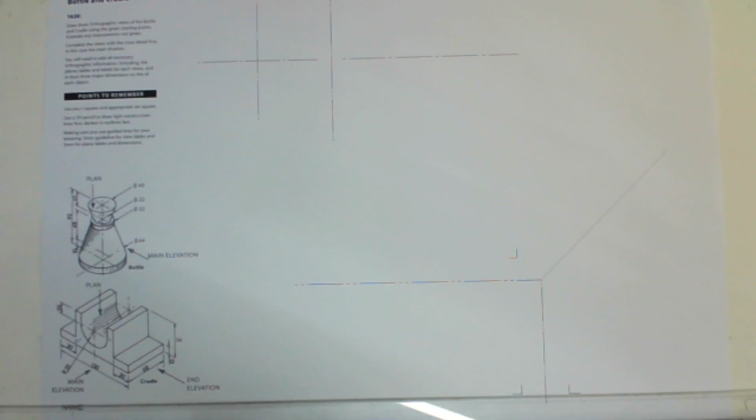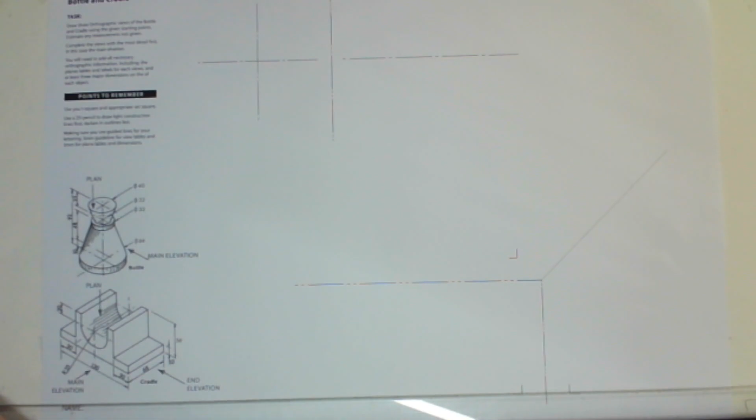Okay, so we are aligned to this one here, which is a printed line because we are never sure that the page goes through the printer straight. Are we aligned? No, we're not aligned. So I'm going to align that there.

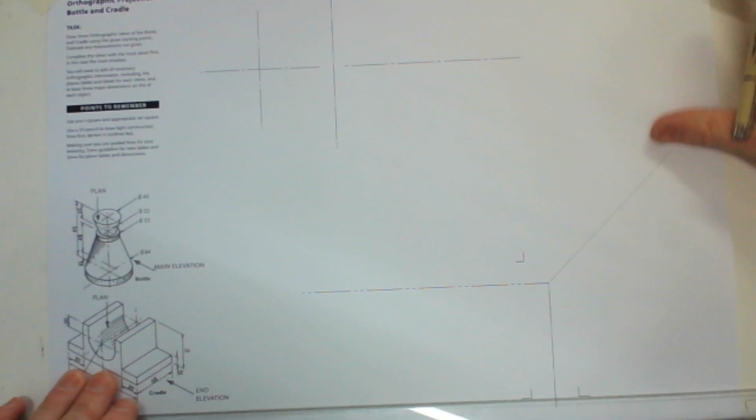Okay, so the first line we're going to do is we're going to connect these starting points. This is given to us. When we're experts, we'll have to make our own starting points and plan out a page accordingly. But for now, since we have starting points, we can draw these all the way across the side of the page. Where are my set squares?

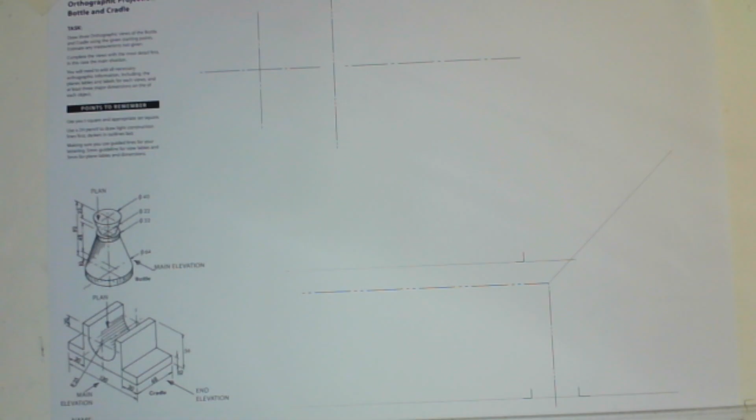Somebody has taken the liberty of rearranging these desks, and I don't have set squares. You see them? Yes. Okay, that's a really inconvenient place to have them.

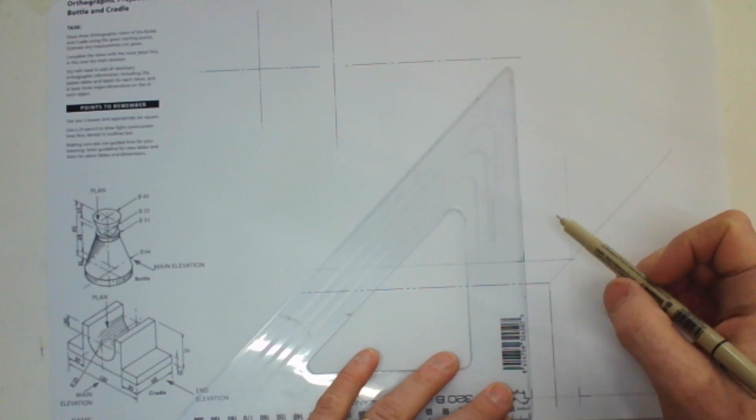And here, so please do follow along if you are watching, this includes you too. Okay, now that we've connected these starting points, let's work towards creating the 3 crates, or invisible boxes, of the views.

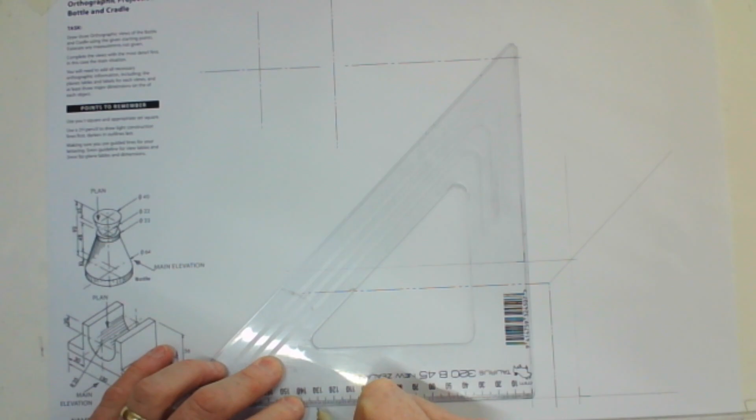So we want to look at the reference here, and we need the full length. So this one here says what? 130. So we'll put the 0 on this starting point and go 130 across. Put the tiniest dot, half the size of an ant's head, and we're going to produce a line through that all the way up the page.

We'll just see if this is a better view. Shimmy this across. Somewhat better.

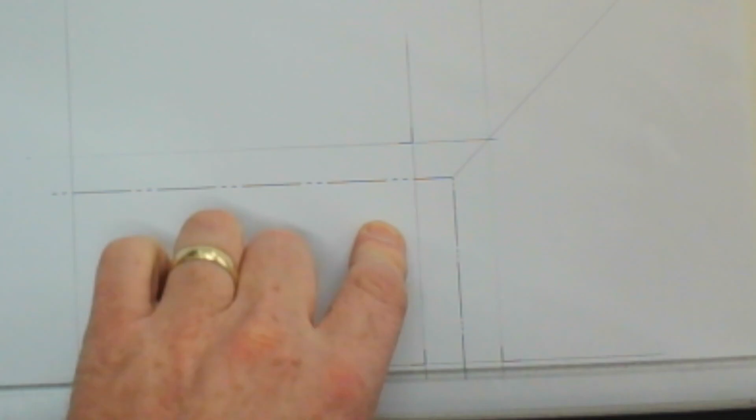And now we want the full height. What is the full height? It says 56. So put the 0 on the bottom line there, and we're measuring up 56. A dot half the size of an ant's head, and then using the T-square plugged into the drawing board, a line all the way across.

How wide is this cradle? We see that it is this measurement, this wide. So we want to know the width for our end elevation, or the height for our plan. So that is 68.

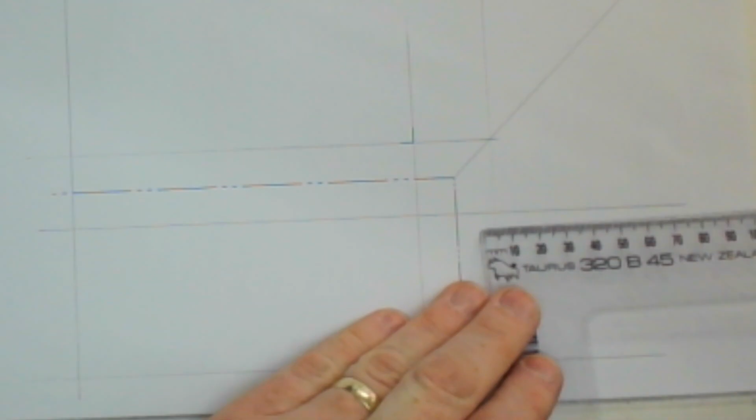So across here we're going to measure, starting at this starting point for the end elevation, across 68, a dot half the size of an ant's head, and through that dot we're going to go all the way up where it hits this 45-degree line, which we'll extend out a little bit. Then from there, looking over the T-square to make sure that we are right on the dot, pen directed towards the T-square and all the way across. Okay, I just need to extend up these lines a little bit because it's longer than I thought.

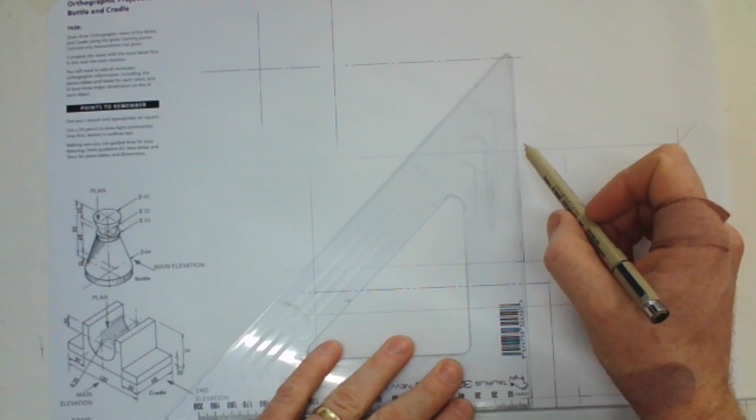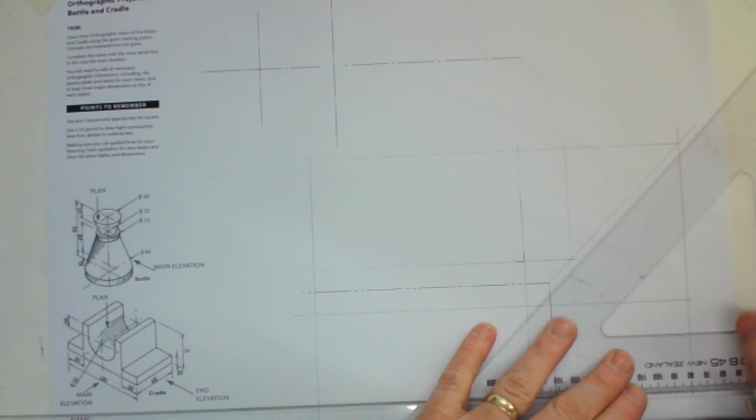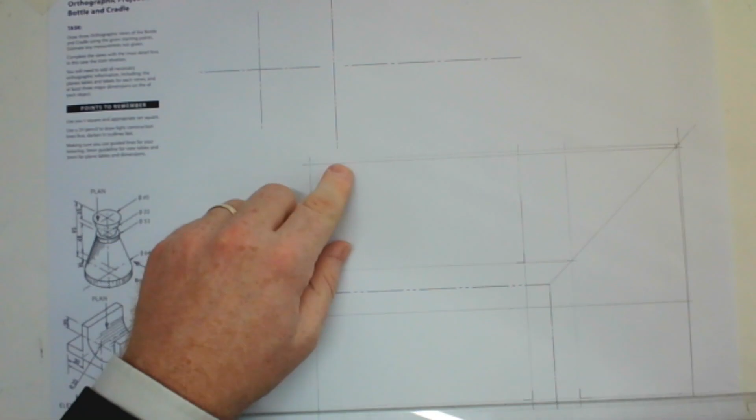And this measurement here should be 68. A little bit inaccurate there, mine's measuring almost 70. So we'll just check, 68 there. That's because that inaccuracy came by because my set square wasn't resting completely on the T-square, or my T-square moved. So I'm just going to redo that line. And if I was working in pencil, I could pencil it out. However, I'm going to make a mental note it's this line and not this line.

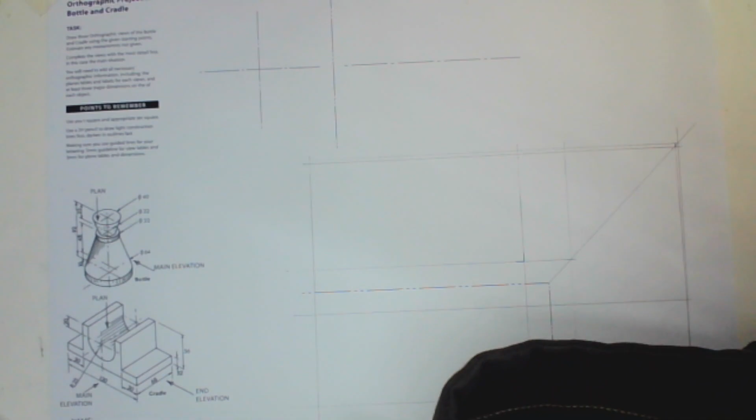Okay, so we've done our 3 views: 1, 2, 3, the plan, the main elevation, and the side elevation. Let's do the inside details. First, I'm going to work on the main elevation because that is the view which has the most detail. So we're going to work on the main elevation and then go from there. Once we've done that, we'll have all the details for the side and the plan view, I suspect.

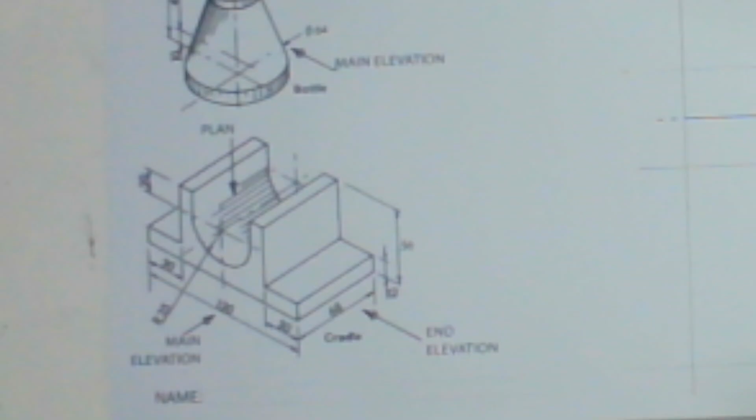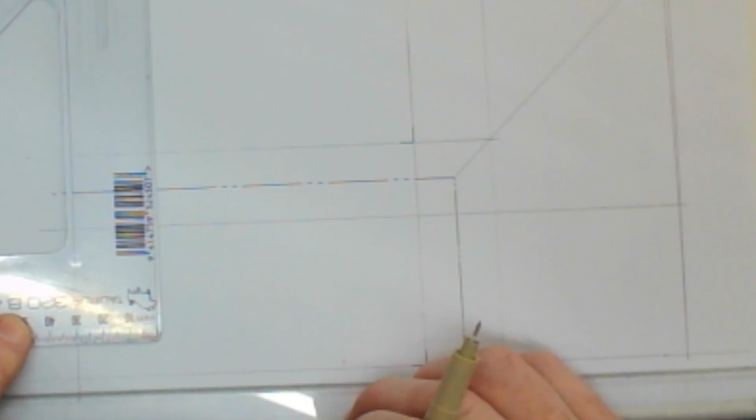So here we go. From the right, we need a measurement for that flat part, just 30 going inward from our starting point. If you need a paper, there's one up here.

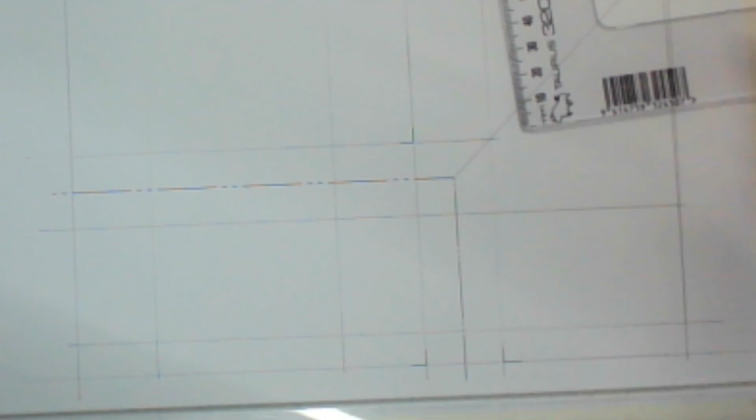Okay, so with those measurements, all the way up the page, all the way up the page. And that flat part is 12 millimeters above, so just making tiny little marks, half the size of an ant's head, and bringing them all the way across.

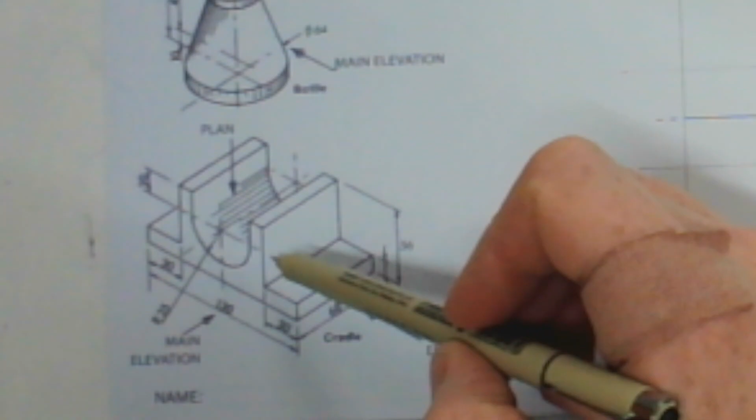We want the flat part for this bit here, which appears to be not given. However, the radius for this is given, and it's 25.

So from the middle, we'll go to the radius here. So what's the middle of 130 across? It's 65.

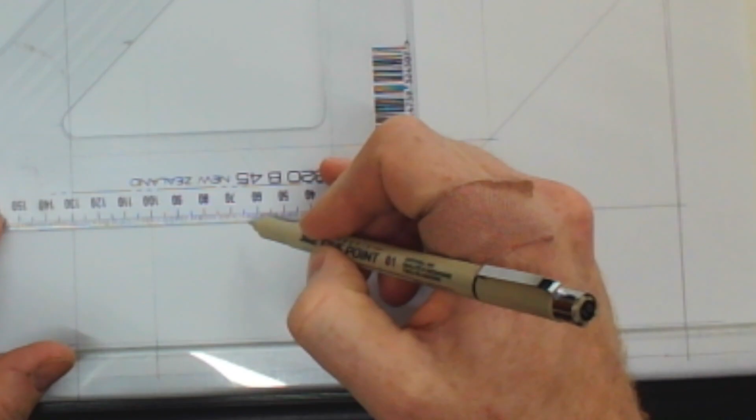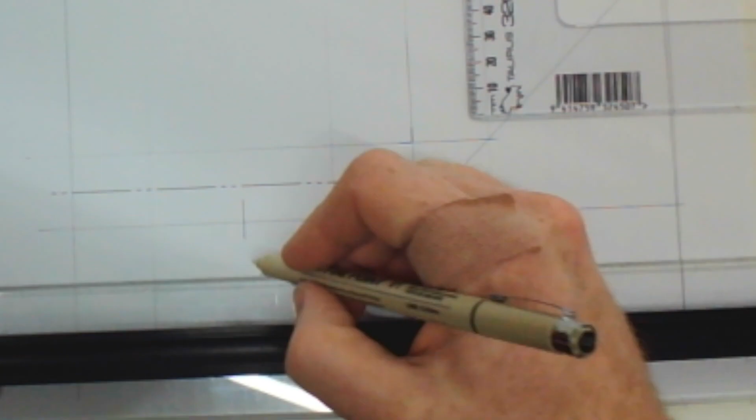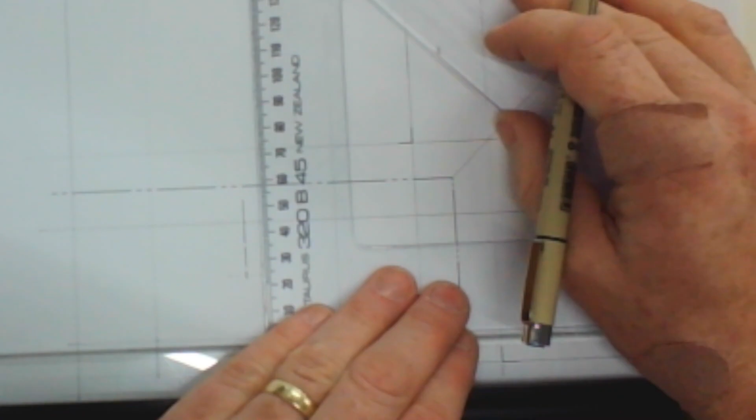Now that right there will be a center line, so I'll just produce in my center line here. I'm just going to find the center point, which is 20 below. And the center line goes through here.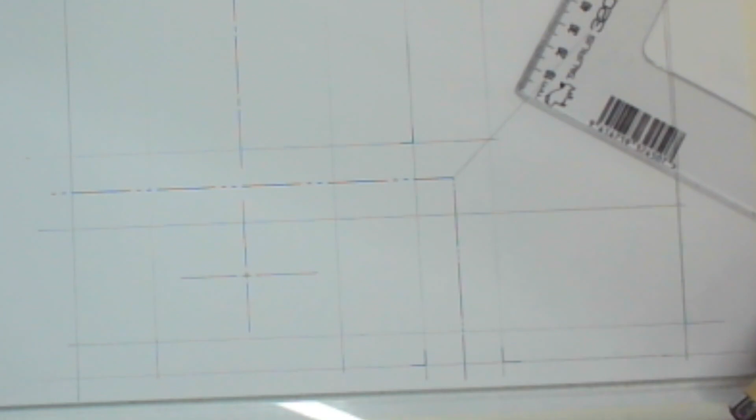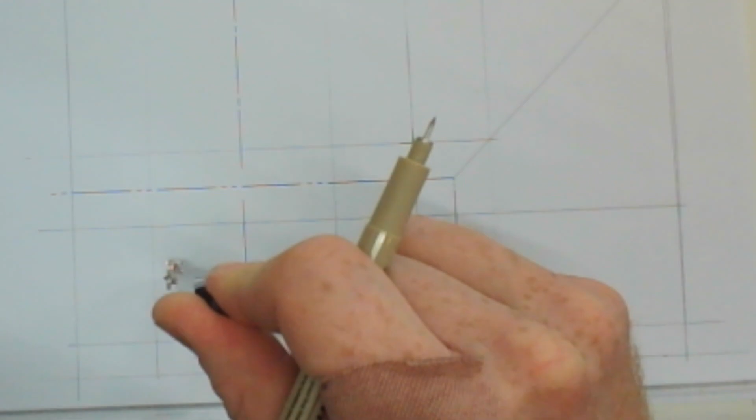And so we need our compass. If the radius is 25, we're going to set our compass at 25. So put the pointy end on the 0 and the pencil on the 25. Found our center, so it comes around. And so this gives us the sides, which will come all the way up and all the way up.

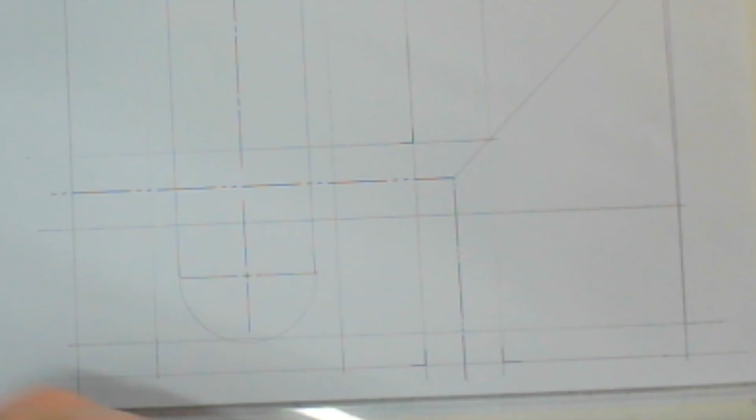Now that's our shape, and we have most of the details for everything, but this end here goes all the way across, and we'll get a dashed line on the right elevation, which is the side of that rounded out bit in the cradle, the bottom of the cradle.

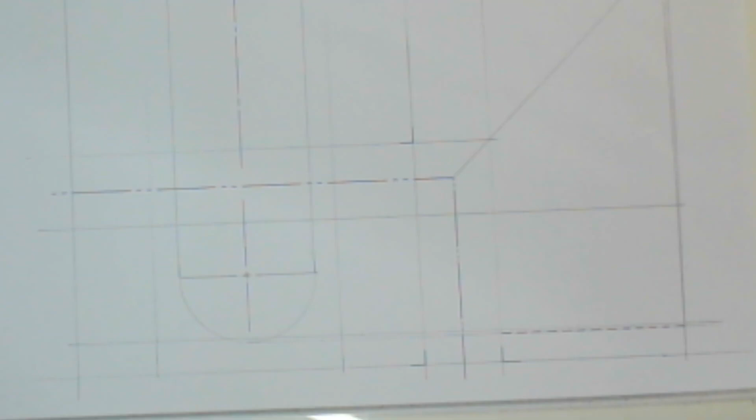With all the details in, we're going to start with the presentation lines, and we'll start right at the top so we're not going back and forth and making smudges.

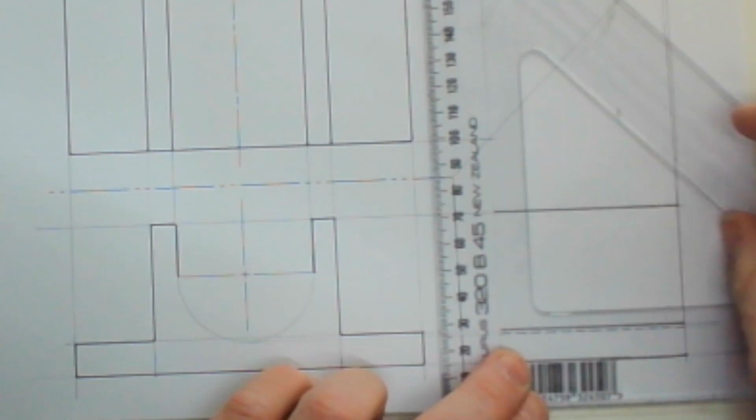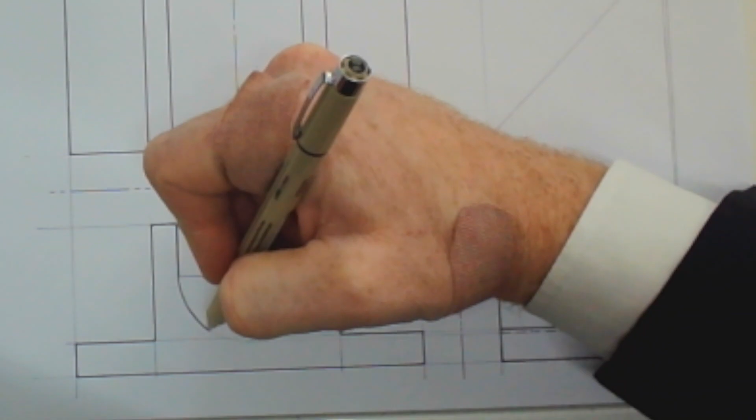So basically that's our orthographic view just finished. When you get expensive compass sets, you can actually get an attachment to put a pen inside a compass, and you can produce this line perfectly. However, this is the way I was taught: freehand, very carefully going around or over a pencil around that circle. And that seems to do it just fine.

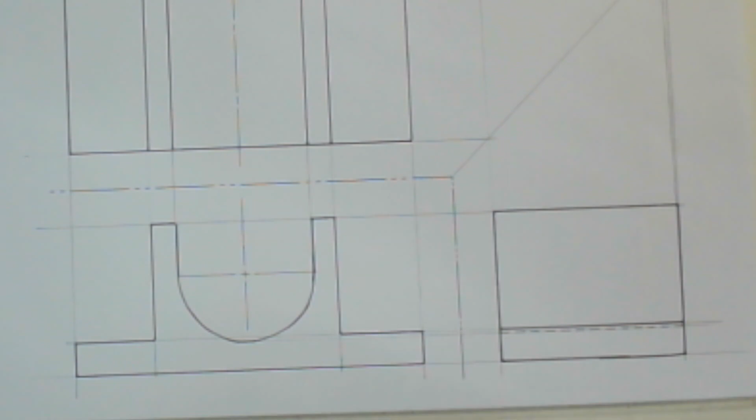The center lines need to be just go over there so it's very clear that they are center lines. You'll note that the center lines go over the view over there.

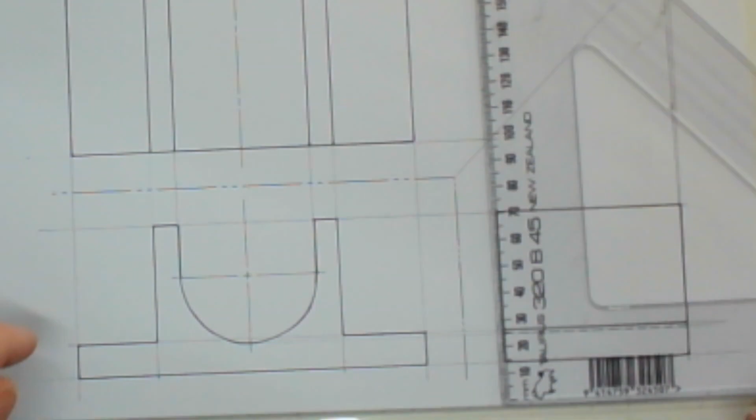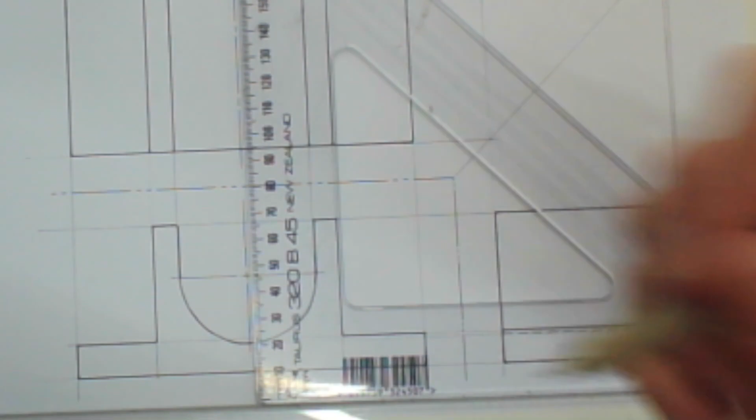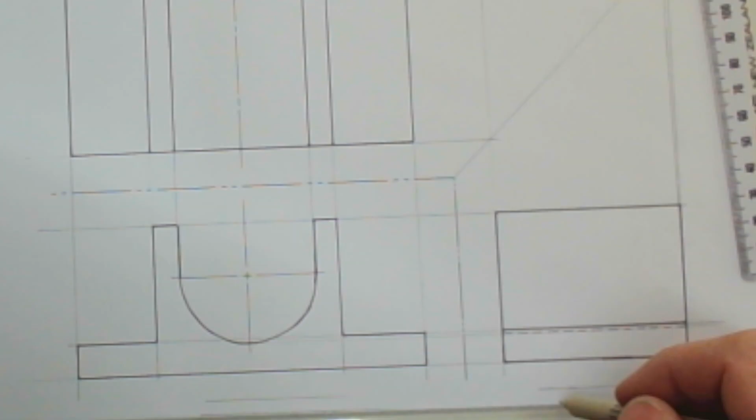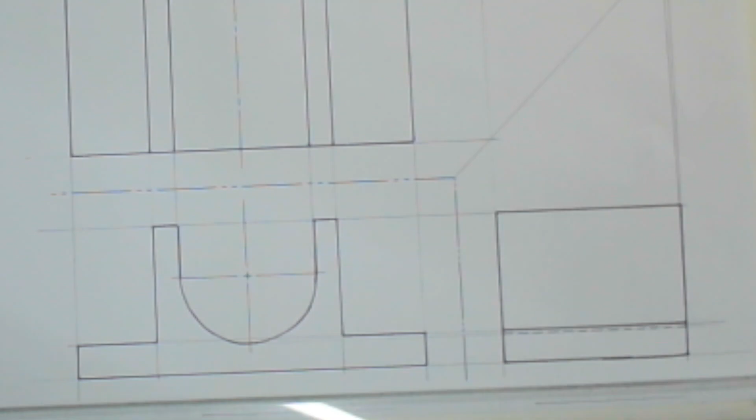That is done, apart from the labels. I'm going to not do the label here because I'm not sure if I'll have enough room for the next drawing up there. In any case, this is called the main elevation, with beautiful capital graphics letters.

And we're effectively finished there.